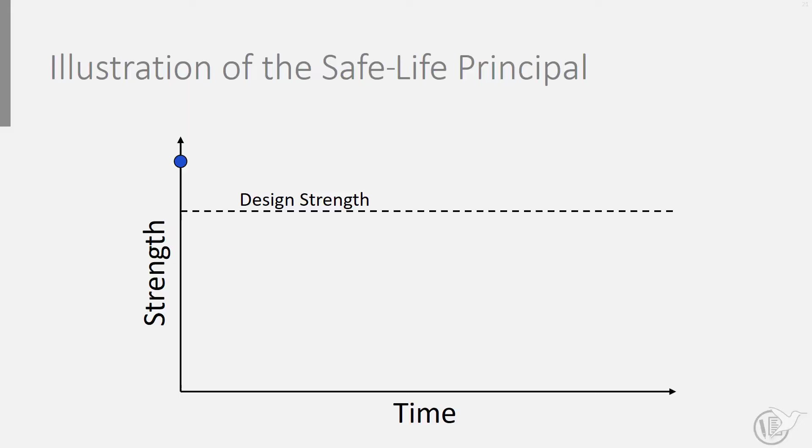The first philosophy is generally referred to as Safe Life, or safety by retirement. Safe Life is the number of flights, landings, or flight hours during which there is a low probability that strength will degrade below design strength. This philosophy is based on the assumption that the likelihood of structural degradation leading to structural strength below the design strength is very low. A pristine structure may degrade due to various circumstances, but before the structural strength would reduce to below a design strength, the aircraft would be replaced or discarded.

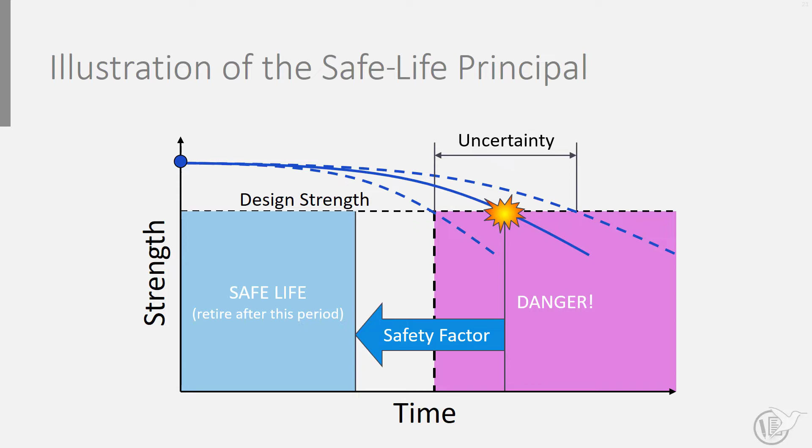This degradation may be induced by phenomena like metal fatigue. Hence, along with the introduction of metallic structures in aviation, the Safe Life design principle developed. In the early days, this philosophy worked fairly well. In most cases, end of life of aircraft was dictated by other factors than the likelihood of failure, in particular with most military aircraft. There are, however, aspects that may cause issues with this Safe Life design philosophy.

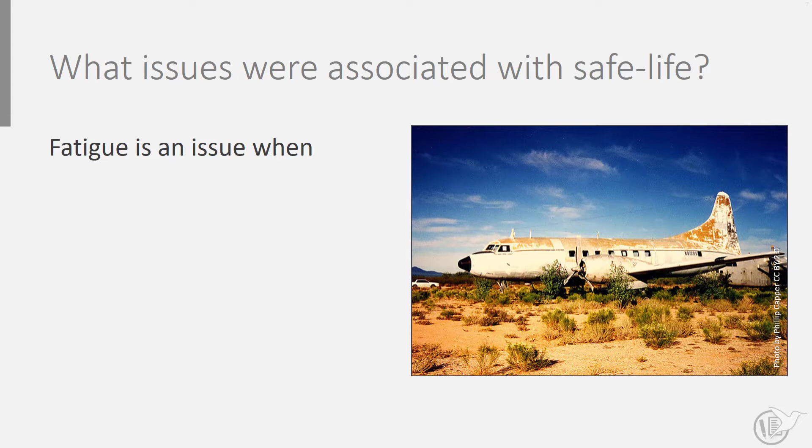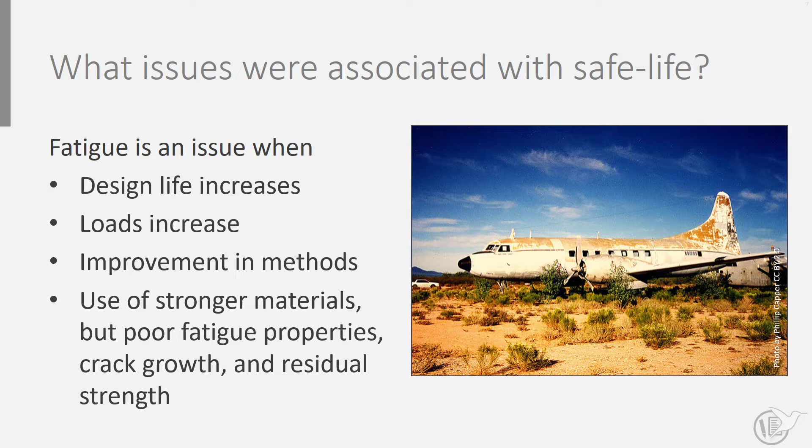For example, the lifetime is increased because the operator wants to exploit the aircraft for a longer duration of time. Or, in aircraft development and design, other methods or materials are introduced that effectively result in shorter lifetimes. Consider, for example, replacing one aluminium alloy by a stronger alloy to improve the airframe strength. This stronger alloy could have poor fatigue properties, resulting in more rapid degradation of the structural strength.

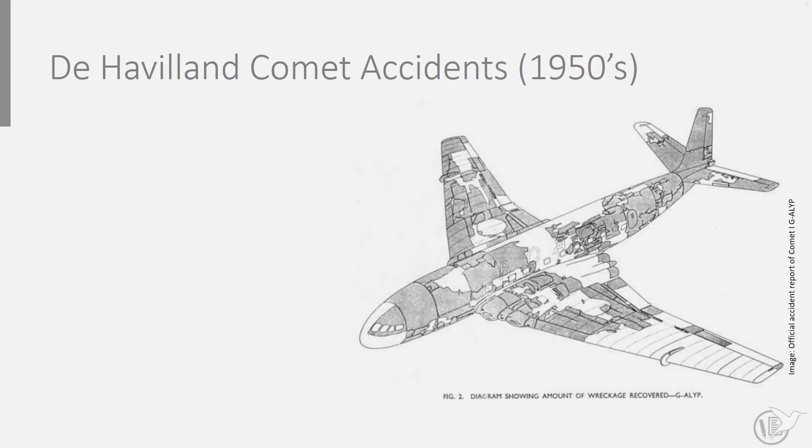Well-known aircraft accidents associated with the Safe Life design principle are the De Havilland Comet accidents in the 1950s. With two of these aircraft, the fuselage exploded during cruise at high altitude. Cracking occurred at window cutouts imposed by the rather high stresses.

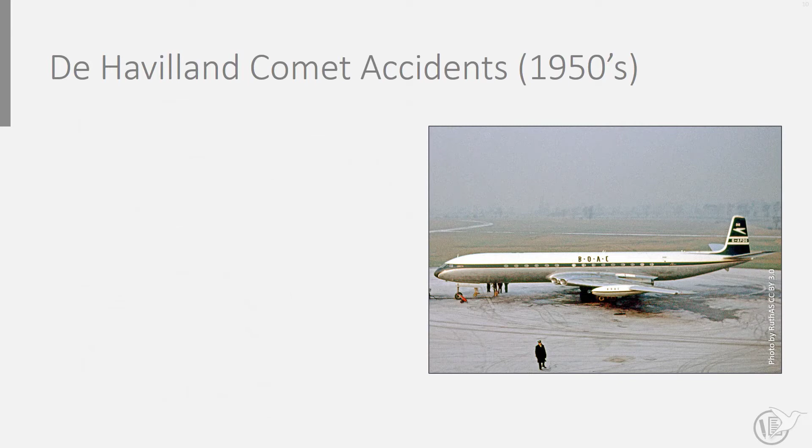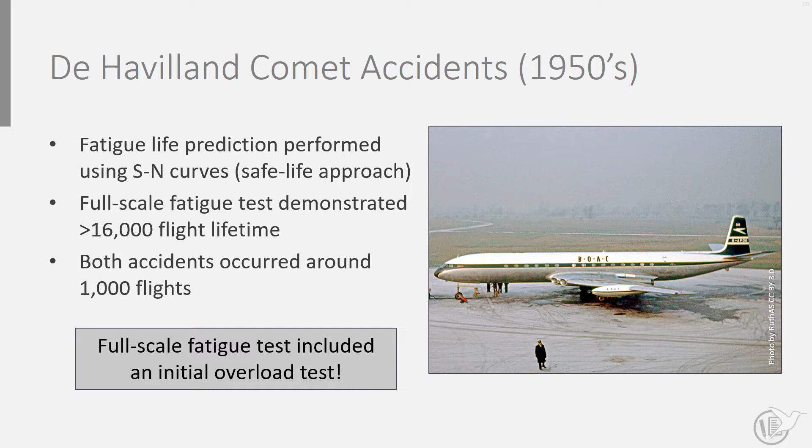These accidents were not expected because fatigue was considered in the design. For example, the full-scale fatigue test resulted in failure after about 16,000 flights, while both aircraft accidents occurred near 1,000 flights. This difference is attributed to the fact that the full-scale fatigue test was executed after an overload test was applied. This resulted in favorable stress redistributions, relieving fatigue-critical locations. Repeating the test with an aircraft taken from service resulted in only 3,000 flights until failure.

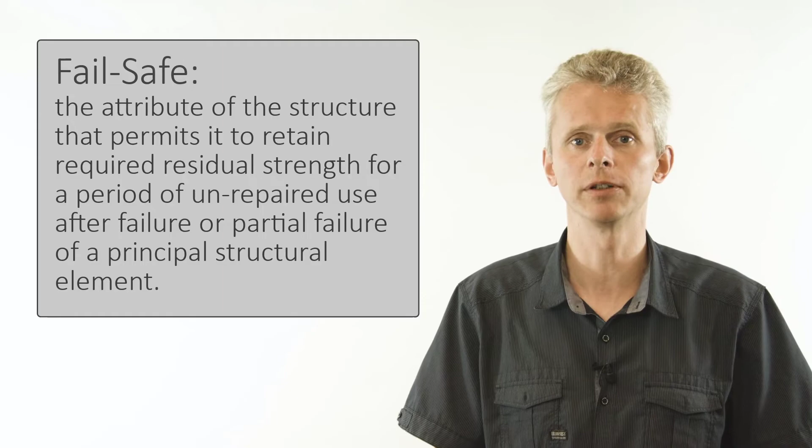The second design philosophy is called Fail-Safe, or safety by design. Fail-Safe is the attribute of a structure that permits it to retain required residual strength for a period of unrepaired use after failure or partial failure of a principal structural element. This design principle emphasizes the use of multiple load paths, that is, multiple elements carrying the load.

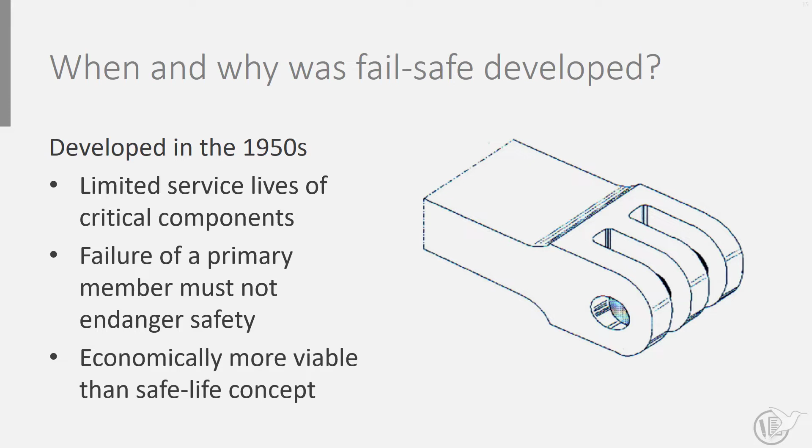This concept is based on the observation that critical components had limited service lives. The concept assumes that failure of a primary member should not endanger aircraft safety because other components still could carry the load. Structures therefore were designed to be more robust. Aside from improving safety, this turned out to be more economically viable than the safe-life concept because elements could be operated longer before retirement.

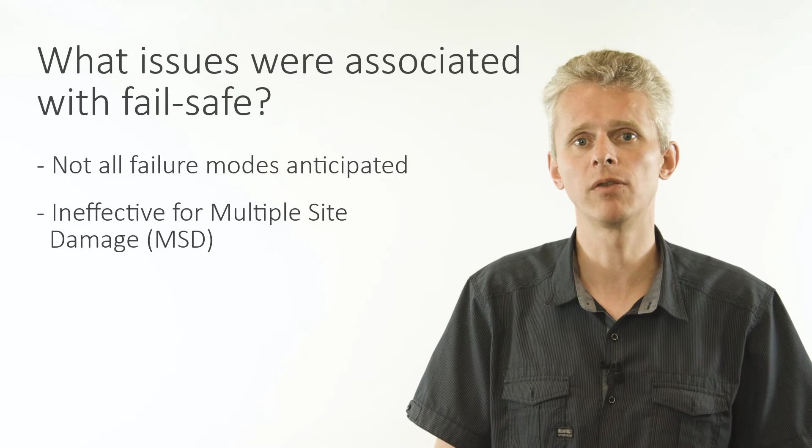The concept is based on identifying all events and failure modes for which structural strength has to be established. An issue observed with this principle, however, was that in reality events occurred that were not anticipated in design. Another problem making this concept less effective is the occurrence of multiple site damage. If all load-carrying elements slowly degrade or build up damage, then failure of one member may lead to the case where the remaining damaged members are no longer able to carry the load.

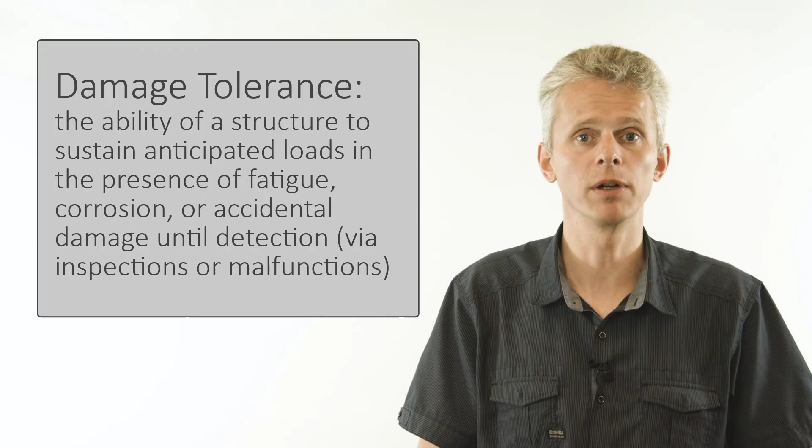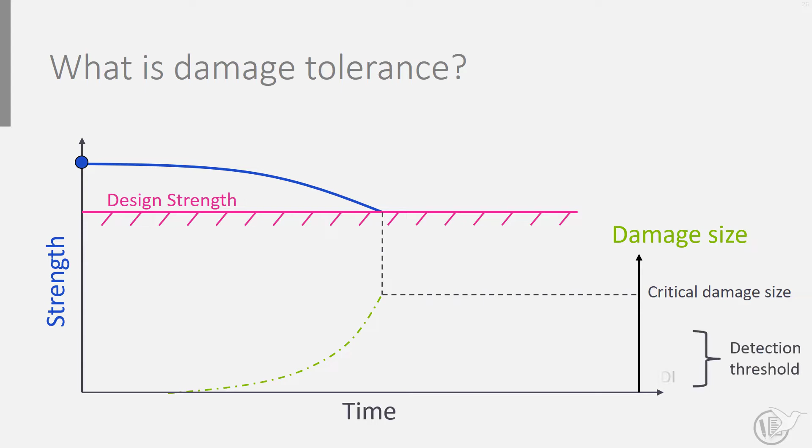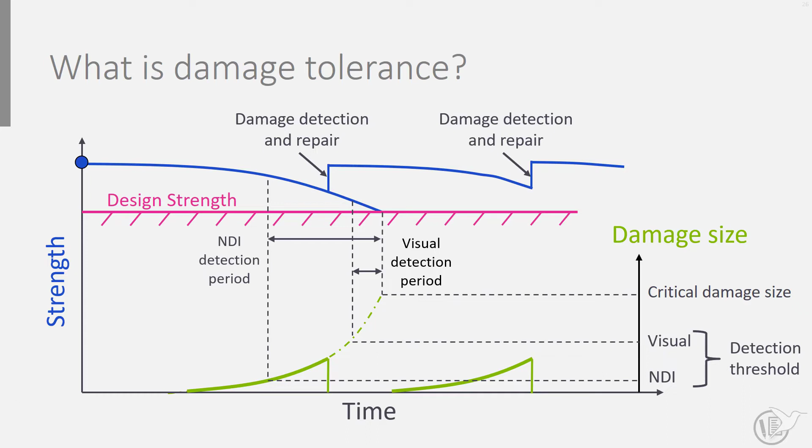With service time, damage slowly will develop, corresponding to a slow reduction of strength. Depending on the inspection method, damage of different sizes may be detected. Once damage is detected, regulations require that the structure is repaired, corresponding to the strength returning to its pristine strength. When strength reaches the fail-safe requirement, design strength, then damage has reached its critical size. The time window between detection and critical or allowable damage size is the time available for inspection, detection, and repair.

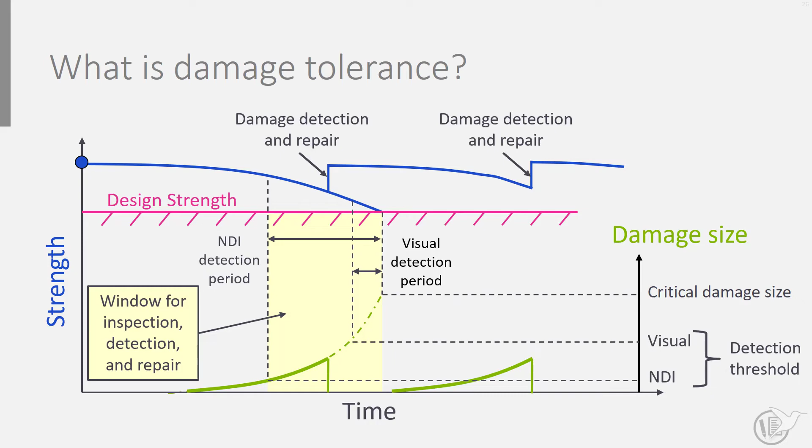The damage-tolerant design philosophy has been introduced in the certification requirements in 1978. This change in design philosophy was not meant to replace the previous design philosophies, but added scheduled inspections to the existing practice. In addition, strength assessment had to assume imperfections and manufacturing flaws present in the pristine structure from day one, which implies more emphasis on damage growth analyses rather than structural life. The scheduling of inspections assures the durability, although they should be economically feasible.

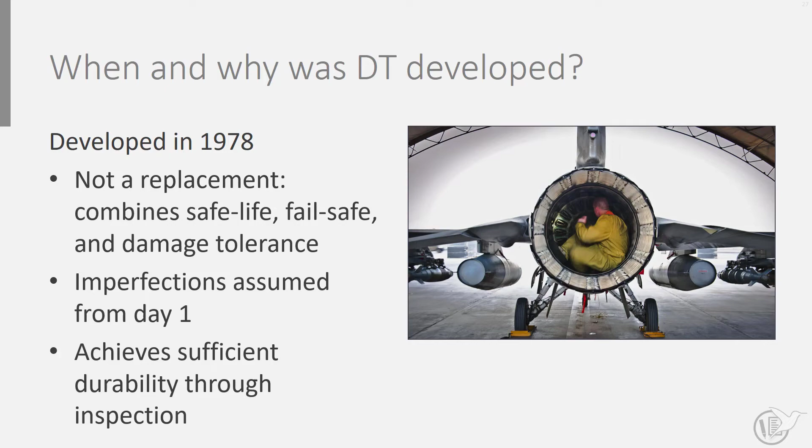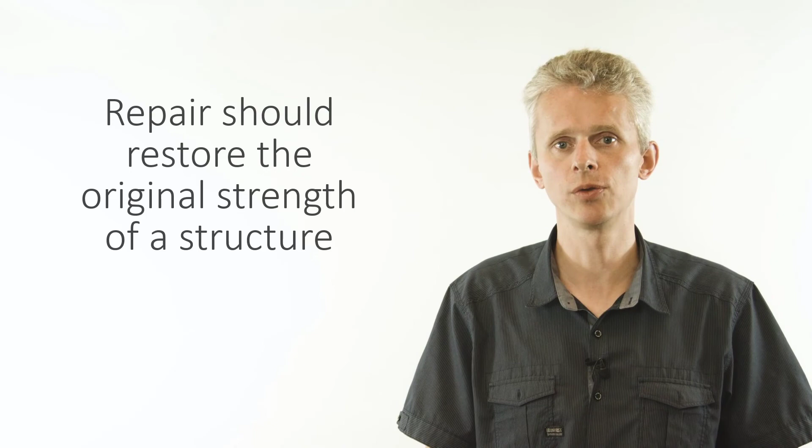The previous graph, illustrating the restoration of strength when repairs are applied, illustrates a fundamental assumption in the damage-tolerant design philosophy. Repairs should restore the original strength of a structure.

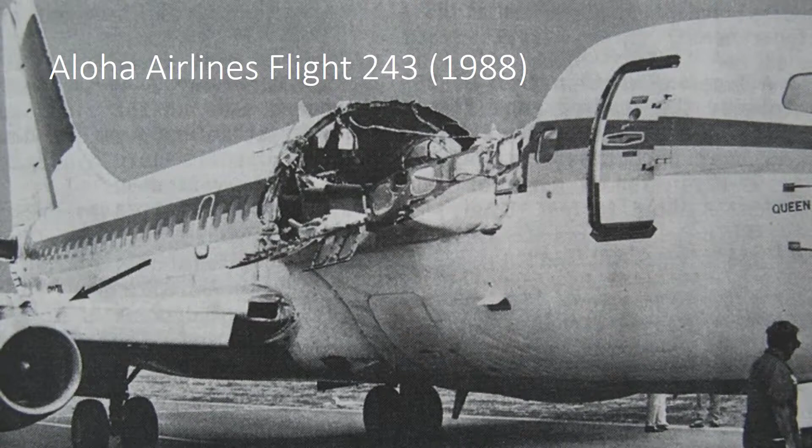Although the damage-tolerant design philosophy significantly improved the durability of airframes, it does not guarantee safety in itself. This is illustrated by the Aloha Airlines accident, where a Boeing 737 lost a significant portion of the upper fuselage structure. This failure was caused by multiple site damage in the riveted longitudinal fuselage joints. These joints were susceptible to corrosion because the aircraft operated in a warm, humid maritime environment. The operator was advised by Boeing to inspect these joints, but it did not perform the required structural inspection, resulting in failure.

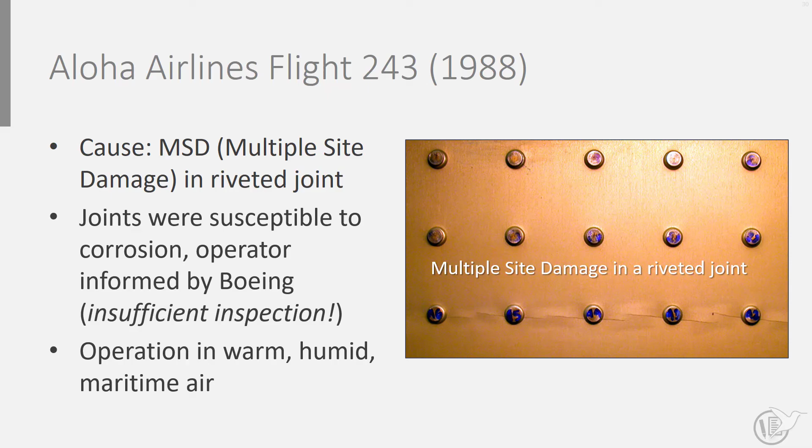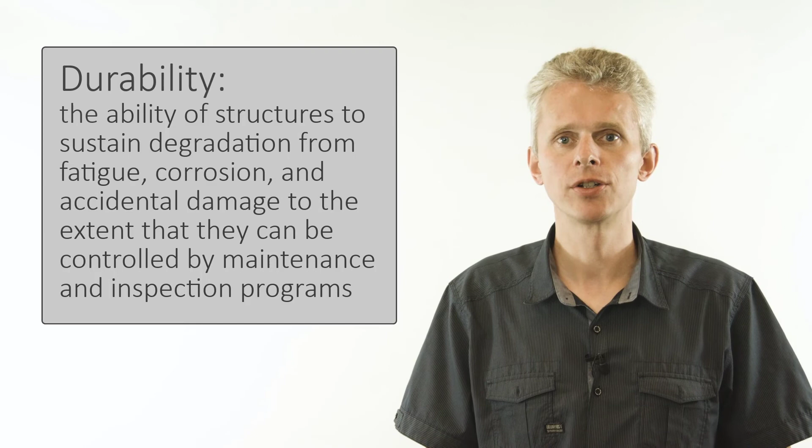The combination of fatigue damage with environmental influences has resulted in airframes these days needing to be designed damage-tolerant and with sufficient durability. Here, durability is defined as the ability of a structure to sustain degradation from fatigue, corrosion, and accidental damage to the extent that they can be controlled by maintenance and inspection programs. In practice, this means that every aircraft manufacturer should demonstrate damage tolerance through analysis supported by tests.